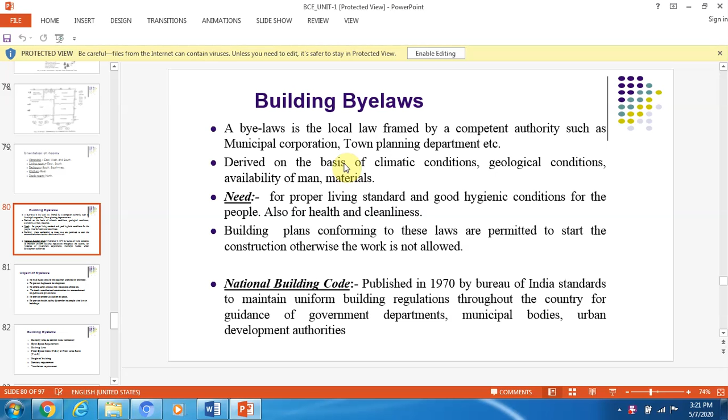We will see building bylaws. Building bylaws is a local law framed by the competent authority such as municipal corporation, town planning department, PWD department, etc. These building bylaws are framed in or derived from the National Building Code.

These are derived on the basis of climatic condition, geological condition, availability of man, materials, etc. in that locality. Need of building bylaws is for proper living standards and good hygienic conditions for the people, also for health and cleanliness. Building plans conforming to these laws are permitted to start construction.

Otherwise, the work is not allowed. The plans are objected or the building work is stopped. The plans are not sanctioned if they are not according to the building bylaws framed in that municipal corporation location or by the town planning.

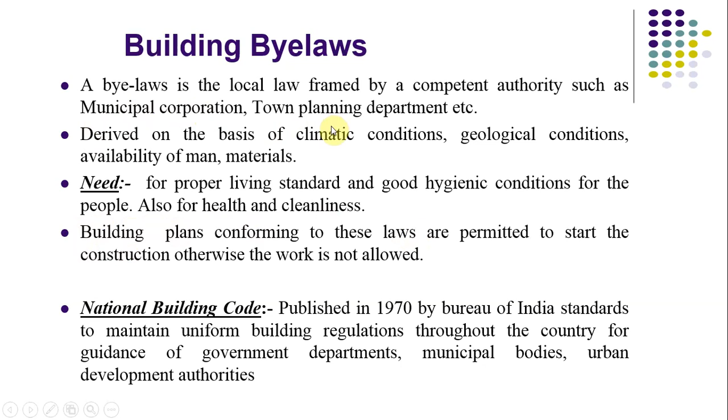So why is it necessary to have these building bylaws? The object of building bylaws is that it gives guidelines to the designer, architect or engineer while planning, such as minimum sizes of rooms, heights of buildings, and many others. So it provides guidelines while designing the building, it is a main guideline provided while designing.

Next, it prevents haphazard development. Uneven development is avoided here. It affords safety against fire, noise and smoke. In the bylaws, all these factors which can cause fire, noise pollution, and smoke pollution are well considered, and according to these norms we have to plan, which helps us have safety against all these factors.

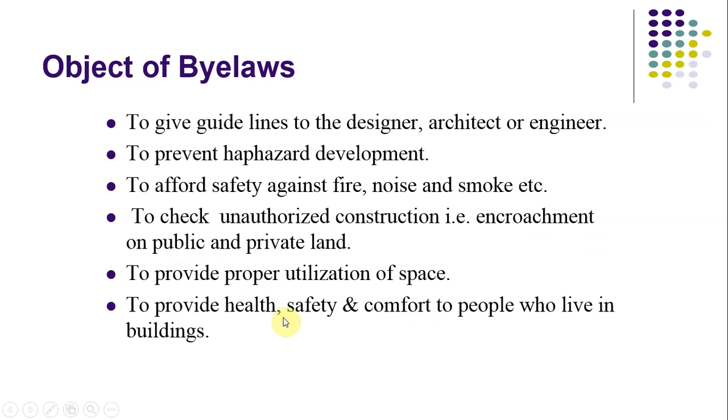To check unauthorized construction, encroachment on public and private land, to provide proper utilization of space, to provide health, safety and comfort to the people living in the building.

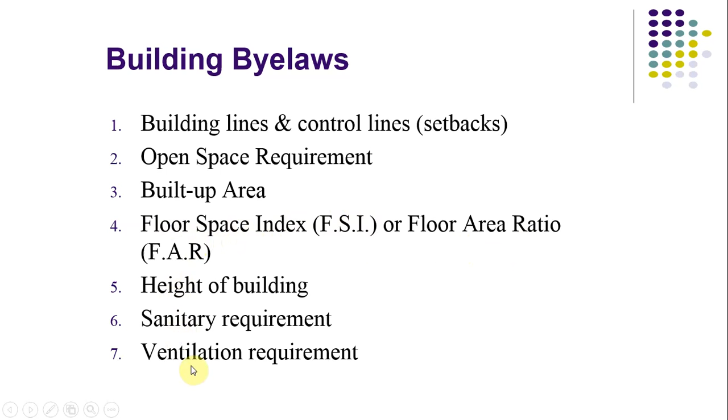These are some basic building bylaws which the designer should keep in mind: building line, control line - these are something like setbacks, we'll see in detail. This is the list: open space requirement, built up area, floor space index (FSI or FAR), height of building, sanitary requirement, ventilation requirement. These bylaws are considered in the current presentation.

Building line is nothing but the setback, wherein from the boundaries the building is set back. There are many boundaries along the building: a front boundary facing the road, side boundary, rear boundary. These are the various setbacks.

In building line, we'll only consider the front line, not the side margins or side setbacks or the rear setback. The setback line is a line up to which a building is allowed to extend as compared to the road, meaning the line from the building's front to the border or road of the building. This is nothing but a setback line - the building is set back some distance from the road.

Next, here we'll see building line. For a residential building, the setback line is termed as building line (BL). The setback line for an industrial building is termed as control line. So there are two different lines: building line for residential building, control line for industrial building, and both these lines are the front line of the building, not the rear, not the side.

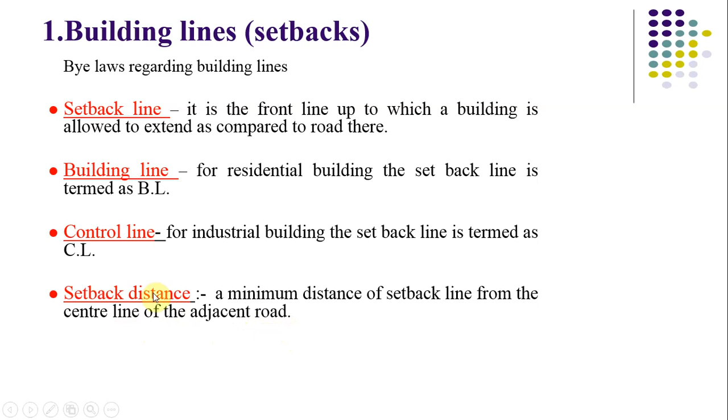So here you can see this is the road and this is the road line, the center line of the road, and here you can see this yellow line which is the building line or edge of the building. So building line is the setback distance from the center of the road to the front line of the building. This is called building line.

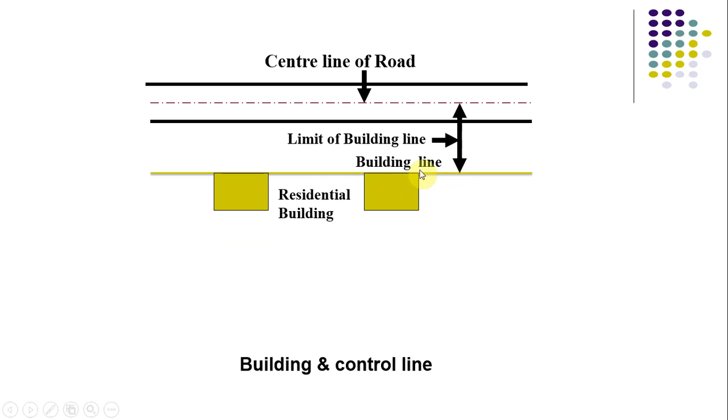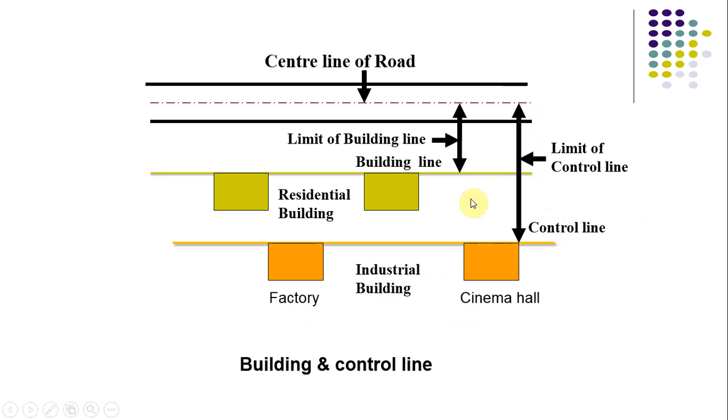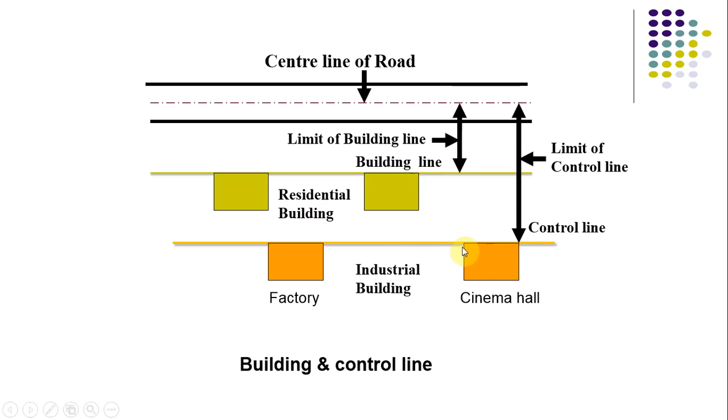Next, this building line is for residential buildings, not for commercial buildings. Then we have the orange line, which is the control line for commercial buildings such as factories, industrial buildings, cinema halls. This is measured from the center of the road to the edge of the building. So the building line is for residential buildings, and the control line is for industrial or commercial buildings.

So we'll see why it is. First, what are the advantages of the building line? Building line can be a setback. This setback distance can be used for the purpose of widening the road in future. If there is a need for expansion of the road, we don't want to destroy the building, so we leave a space, that setback distance, which can be utilized for further widening of the road.

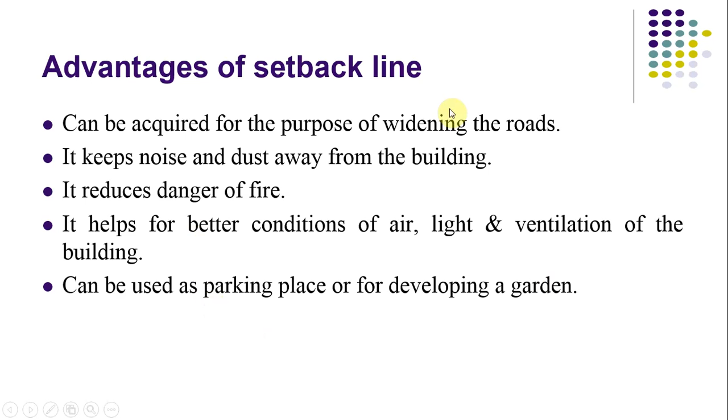It keeps the noise and dust away from the building if you keep a proper distance. It reduces the danger of fire. It helps better conditions of air, light, ventilation, and can be used for parking places or for developing a garden. So this is the basic requirement or purpose of the setback line, and these can be termed as advantages of the setback line.

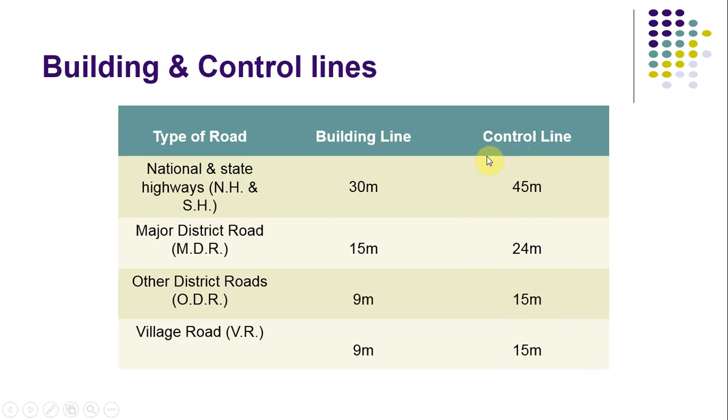Okay, next we will see the open space requirement. This is the open space required around the building, in the front, side and rear. This should be left around the building depending upon the air and light requirement of the building. Open space shall be open to the sky, and a chhajja or roof or more, not more than 0.75 meter wide, shall overhang on such open spaces. So no balconies are allowed to extend, but chhajjas are allowed to extend into this open space at a distance of 0.75 meter.

Open areas also provide facilities for parking, future expansion of roadways, good approach and access to other amenities such as water supply line and drainage line. So it can be used for circulation space, water supply line, drainage line, electrical lines and other amenities and services which are required to be put around the houses.

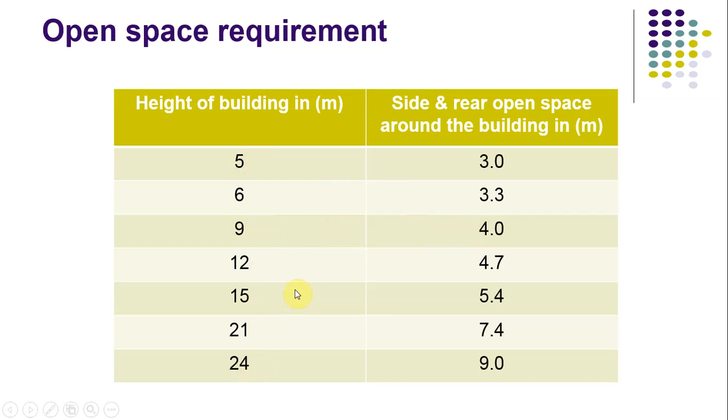If a building height is 6 meters, the open space requirement is 3.3 meters. If the building height is 9 meters, the open space or side space is 4 meters. So as you can see, as the building height increases, the open space requirement also increases. This is for the purpose we have already seen.